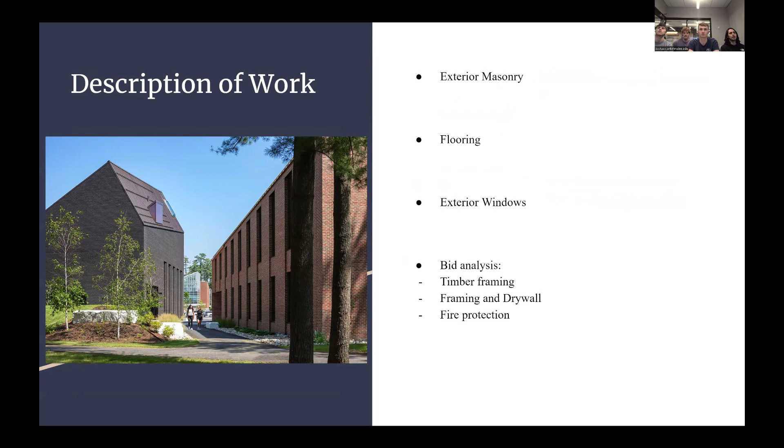The description of our work in the request for proposal provided to us includes installation of exterior masonry, flooring, exterior windows, labor estimates, and bid analysis for mass timber, framing and drywall, and fire protection. Our team has thoroughly looked through the plans and specifications and subcontractor quotes to provide you with the highest quality bid proposal at the lowest cost.

Safety is very important to us at Orono House Builders, a value we know is very important to Consigli. We have created a detailed safety plan with site-specific information to ensure that the work is completed safely as well as on schedule. Construction is reportedly the most dangerous industry to work in.

In 2019, there were 1,102 construction-related fatalities reported to OSHA. The focus 4 hazards are struck by, caught in between, falls, and electrocutions, which account for two-thirds of the reported deaths. At Orono House of Builders, we have made it part of the job description to keep ourselves and our

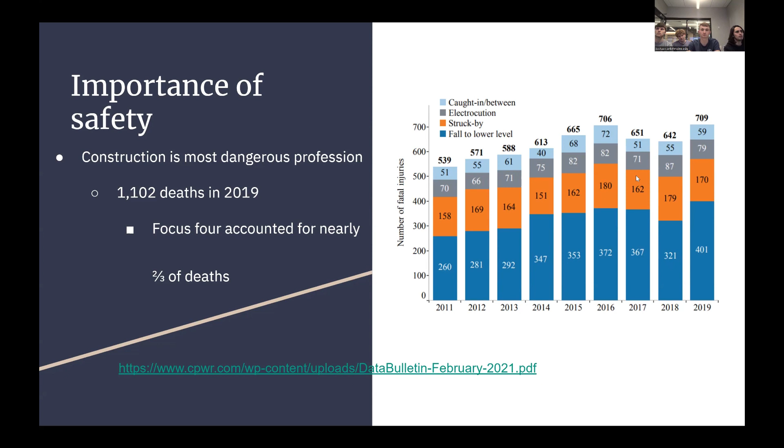coworkers safe. Our contract will end 644 calendar days later on December 5th, 2026. Our demobilization date will be November 28th, 2026. Our work schedule does not include federal holidays or weekends.

The logistics plan: using site plan C3.2 in Procore, Orono House of Builders plans on preventing as much pedestrian and automotive disruption as possible during the construction phase, keeping all project-related items, dumpsters, trailers, equipment, materials, and crews as close to the project site as possible.

Below you'll find a drawn-on version of the site plan with the designated area for the items listed above. In total, there are approximately 8 vehicle spaces being designated solely for the project. This leaves 47 parking spaces left for pedestrian use.

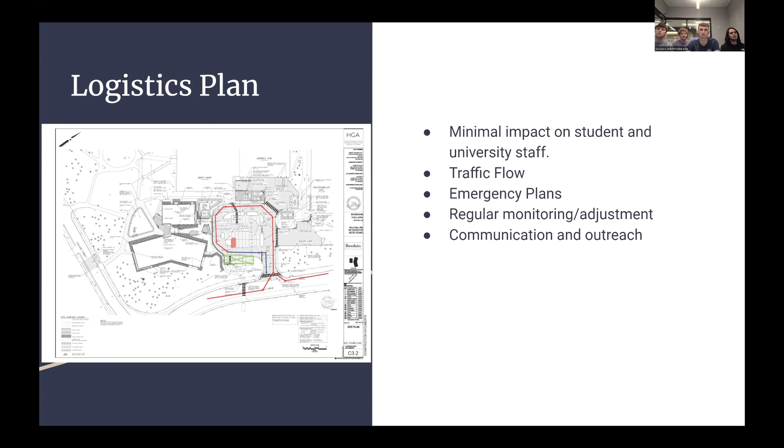On the drawn-on version of the site plan, you can find the area highlighted in green for the 32-foot by 8-foot trailer with space to park the lull and have 2 parking spaces for the project superintendent. The area highlighted in red is the designated area for the dumpster. It is recommended that crews park either on College Street or in the parking spot located near College Street.

Project risks: the risks this project faces are safety, scheduling, and logistics. In our construction project, we must be vigilant about various safety risks, including worker safety, site safety, and compliance risks. Worker safety concerns encompass accidents, injuries, and human errors due to unsafe conditions or lack of proper equipment. Site safety hazards range from unstable terrain to environmental dangers and falling debris. Compliance risks pose threats of fines, legal issues, or delays when safety regulations aren't followed.

Additionally, we face schedule risks such as delays in permitting, adverse weather conditions, material shortages, design changes, labor shortages, and unforeseen site conditions, all of which can impede project timelines. Logistic challenges further compound our efforts, including transportation delays, site access restrictions, coordination difficulties, and utility interruptions, all of which demand meticulous planning and management.

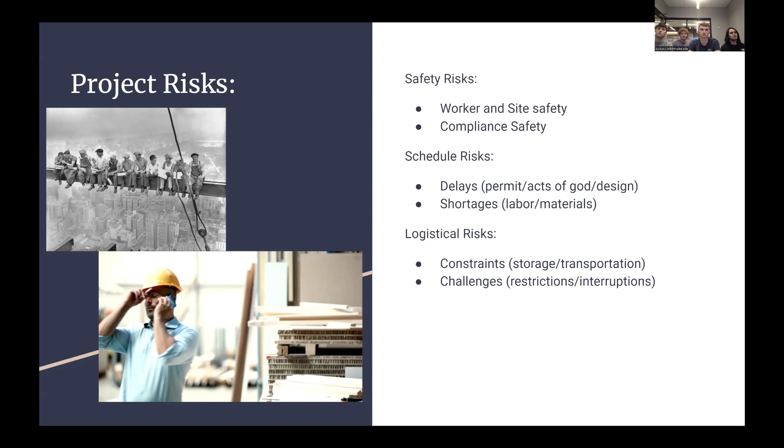Onto the estimations. For bid calculations, we utilize Bluebeam to measure quantities, Excel for quantity and cost tracking, and RS Means to extrapolate cost data.

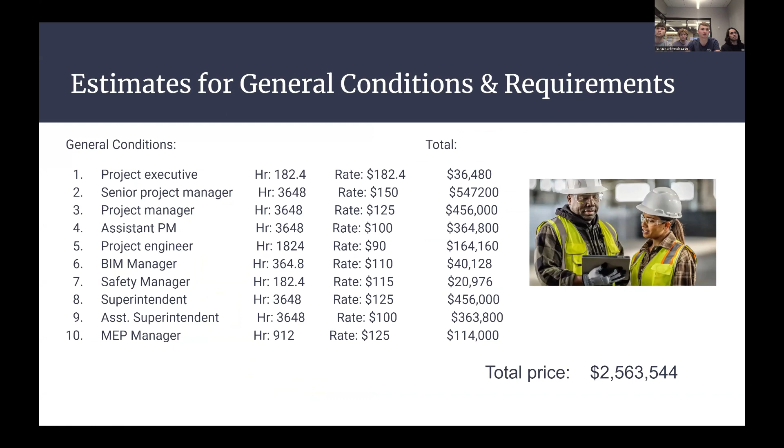At times, crew sizes were increased compared to RS Means data in order to ensure that the project fits within the given time frame. Although much of the data within RS Means related to building construction was extrapolated and adjusted to fit the scope of the given item, careful attention was paid to ensure the quantities found were as close as possible to minimize waste.

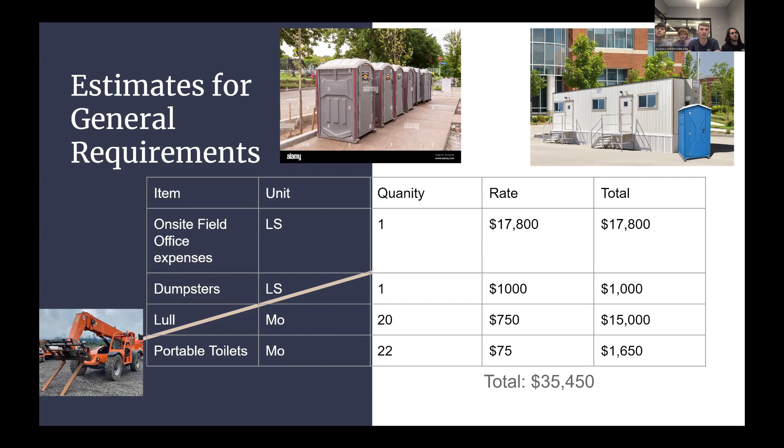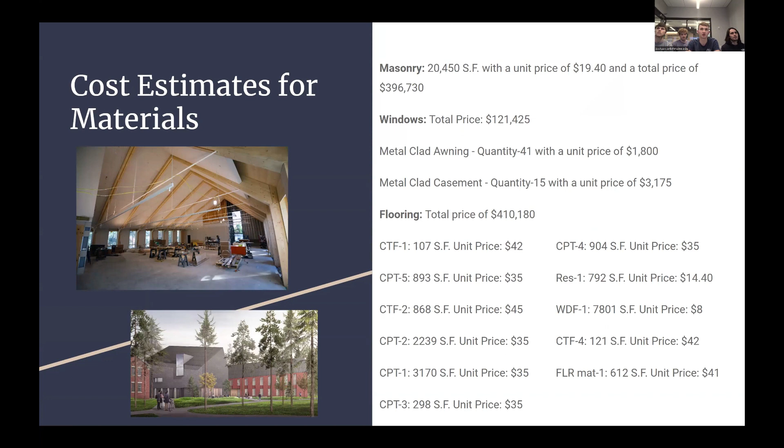For windows, I calculated the square footage since RS Means did not have all the sizes. So I took the prices and figured out the cost of one square foot to find out how much larger windows would be. Subcontractors were carefully considered not only for the lowest cost, but also for the product and service provided.

For fire protection bid analysis, subcontractor B sticks to the contract, reducing mistakes despite lower safety scores. Their quality is high, showing their dedication to standards. They're financially stable, ensuring smooth progress with all necessary insurance. Risks are minimized. They meet deadlines for on-time completion and fulfill all fire protection systems requirements. Agreeing to standard contract terms aids collaboration. Subcontractor B covers all components for fire protection system installation.

For framing and drywall bid analysis, considering the comprehensive compliance with contract documents, scope of work, and general requirements, along with the total cost, subcontractor B remains the most favorable choice for the drywall subcontract. Overall, subcontractor B offers a combination of competitive pricing, compliance with project requirements, comprehensive scope of work, and potentially relevant experience and qualifications, making them the best option.

And now for the timber frame subcontract. Vendor B is the best choice because they follow the contract, meet stair and fire marshal requirements, handle structural needs, offer necessary hardware, and provide a comprehensive scope of work, including design and timber supply. All vendors ensure quality and offer certified wood, while none coordinate on-site. Vendor B is quick with changes and has the shortest lead times, crucial for the project. Plus, vendor B offers the lowest total cost, making them the top contender.

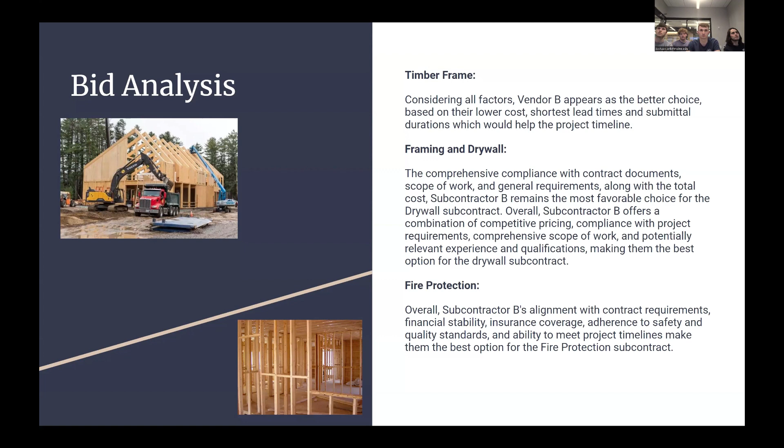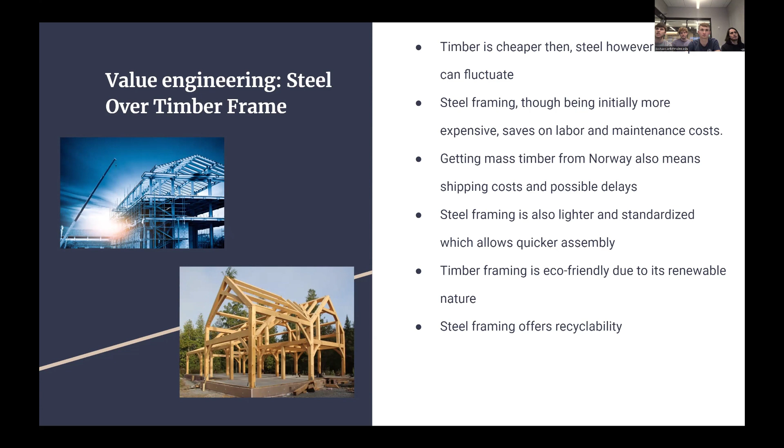Steel framing, lighter and standardized, enables quicker installation compared to timber framing. Prefabricated offsite, it allows faster on-site assembly, leading to cost savings from reduced labor and shorter construction schedules. Environmentally, timber framing is eco-friendly due to its renewable nature, while steel framing, despite higher embodied energy, offers recyclability. This dynamic affects the pricing and relevance of timber framing.

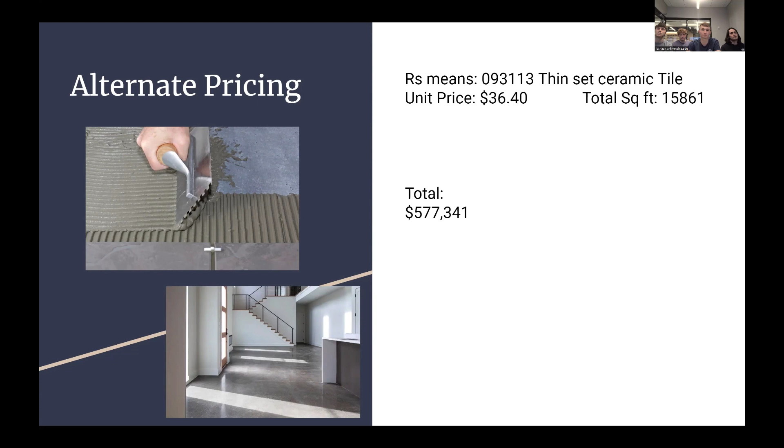And now for the alternate pricing. If we were to put down thin set ceramic tile over all polished concrete areas, we would have a total square footage of 15,861. This tile has a unit price of $36.40, which gives us a total price of $577,341. With that, our total bid price comes to $7.2 million.